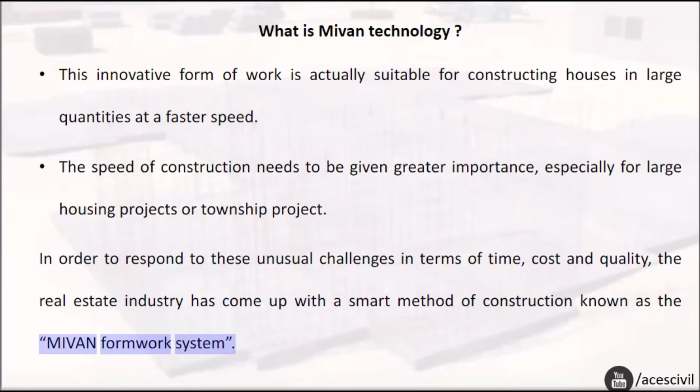In order to respond to these unusual challenges in terms of time, cost, and quality, the real estate industry has come up with a smart method of construction known as the MIVAN Formwork system.

MIVAN technology has been used widely in Europe, Asia, Gulf countries, and other parts of the globe. It is suitable for constructing a large number of houses in a short period of time using room-size forms to construct walls and slabs in one constant pour of concrete.

MIVAN shuttering is a fast-paced construction technique which offers strength and durability to a building by use of aluminum formworks. The MIVAN technology, or the aluminum formwork system, was developed by a European company. Later in 1990, the MIVAN Company Ltd started manufacturing these formworks, hence giving the name MIVAN technology.

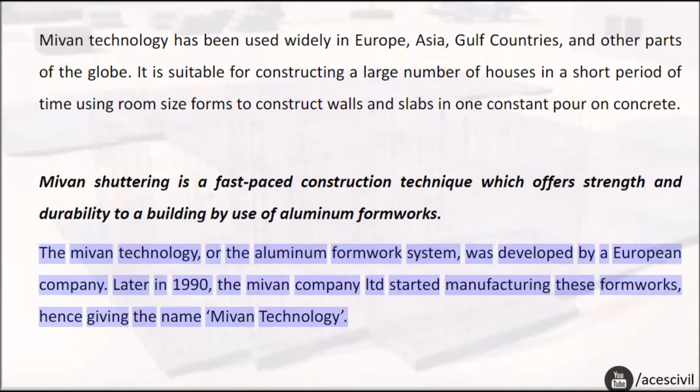Use in India: so far, the technology has not been used extensively in India. The concept is popular in Gulf countries, Europe, and some parts of Asia. However, its use is being promoted in India to realize the most ambitious government scheme, Housing for All by 2022.

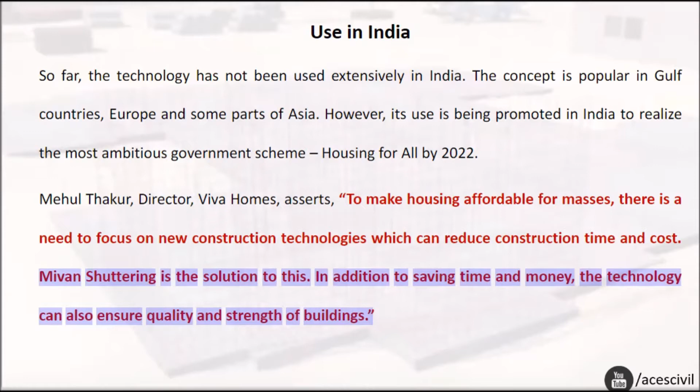Mehul Thakur, Director, Viva Homes, asserts: to make housing affordable for masses, there is a need to focus on new construction technologies which can reduce construction time and cost. MIVAN shuttering is the solution to this. In addition to saving time and money, the technology can also ensure quality and strength of buildings.

Major components of MIVAN Formwork. MIVAN Formwork components are divided into 4 types based on the location of use. First, wall components: A. Wall panel, B. Rocker, C. Kickers, and D. Stub pin.

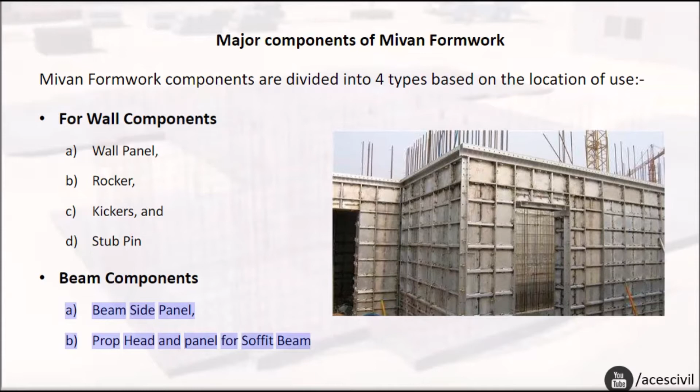Beam components: A. Beam side panel, B. Prop head and panel for soffit beam.

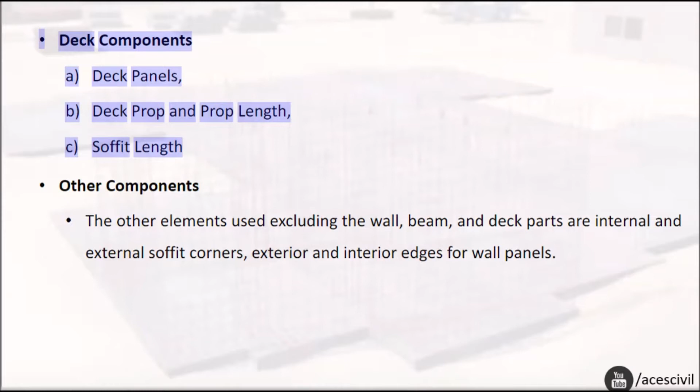Deck components: A. Deck panels, B. Deck prop and prop length, C. Soffit length.

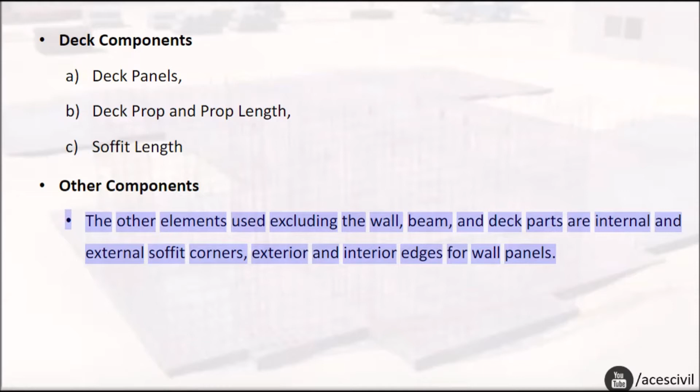Other components: the other elements used excluding the wall, beam, and deck parts are internal and external soffit corners, exterior and interior edges for wall panels. MIVAN Formwork components.

Erection, features, comparison. MIVAN Formwork is the advanced formwork system made of strong and sturdy aluminum components that has great strength, durability, is simple to install, adaptable, and is used in the construction of residential units and mass housing projects.

Components of MIVAN Formwork: the components of MIVAN Formwork are divided into 4 types based on the location of use - wall components, beam components, deck components, and other components.

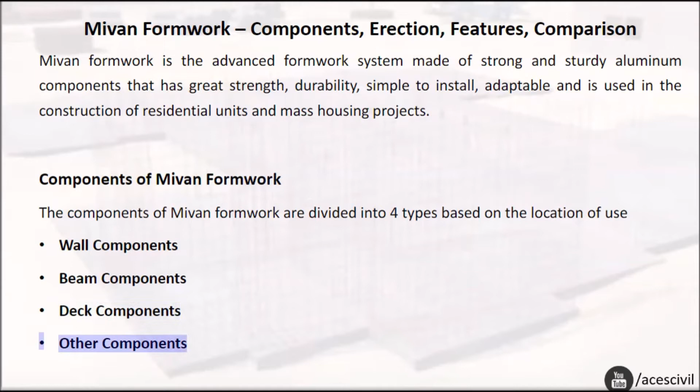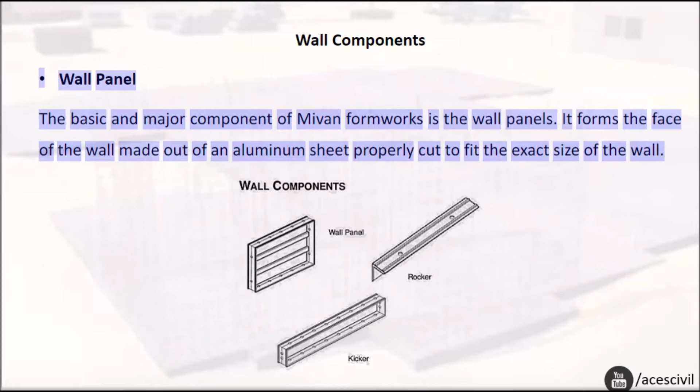Wall components. Wall panel: the basic and major component of MIVAN Formworks is the wall panels. It forms the face of the wall made out of an aluminum sheet properly cut to fit the exact size of the wall.

Rocker is an L-shaped panel having allotment holes for stub pin to support the wall panels. Kickers act as a ledge to support the wall panels by forming a wall face at the top of the panel. Stub pin is the joining component of all other wall components.

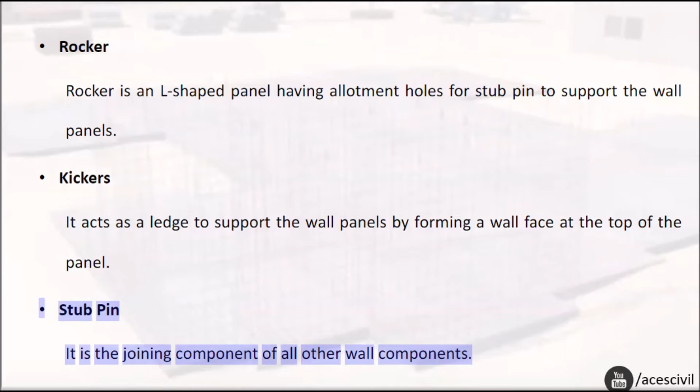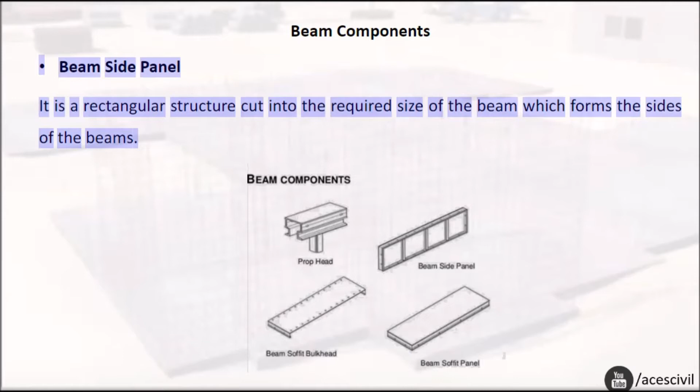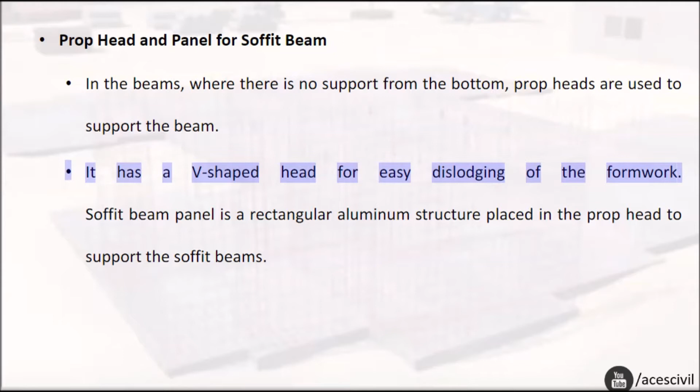Beam components. Beam side panel is a rectangular structure cut into the required size of the beam which forms the sides of the beams. Prop head and panel for soffit beam: in the beams, where there is no support from the bottom, prop heads are used to support the beam. It has a V-shaped head for easy dislodging of the formwork. Soffit beam panel is a rectangular aluminum structure placed in the prop head to support the soffit beams.

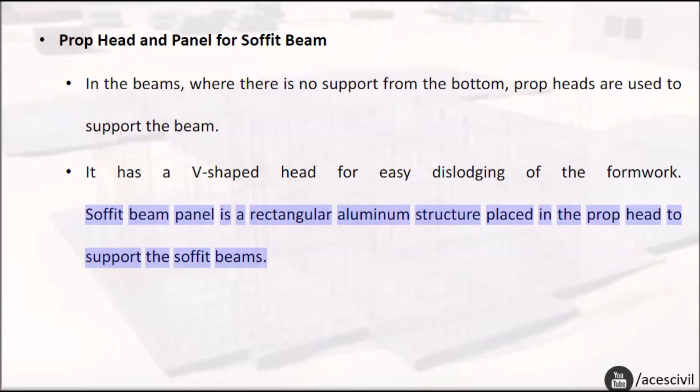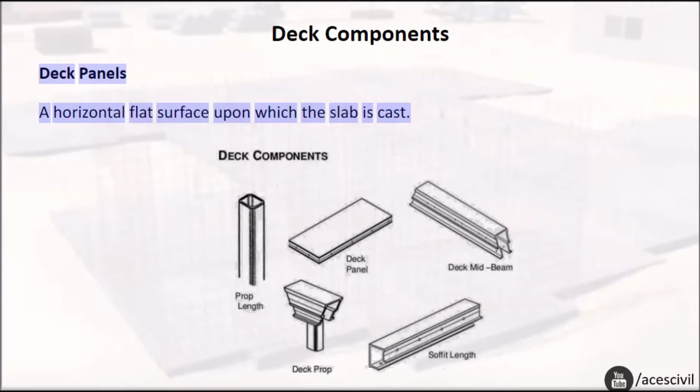Deck components. Deck panels form a horizontal flat surface upon which the slab is cast. Deck prop and prop length: deck prop is the same as the beam deck prop; here it is used to support the slab and bears the load coming on the deck panel. Prop lengths are the vertical support to the deck prop which are adjustable as per the slab height. Soffit length provides support to the edge of the deck panels at their perimeter of the room.

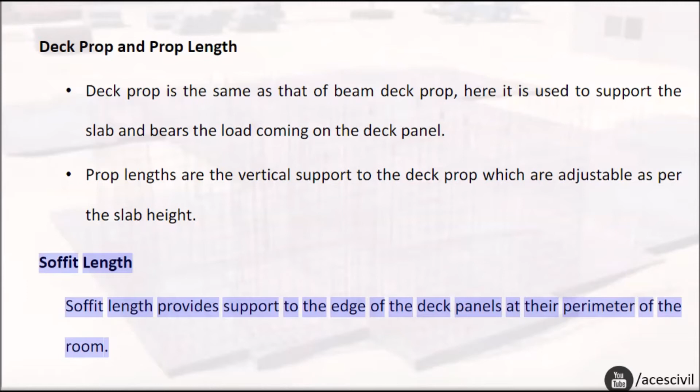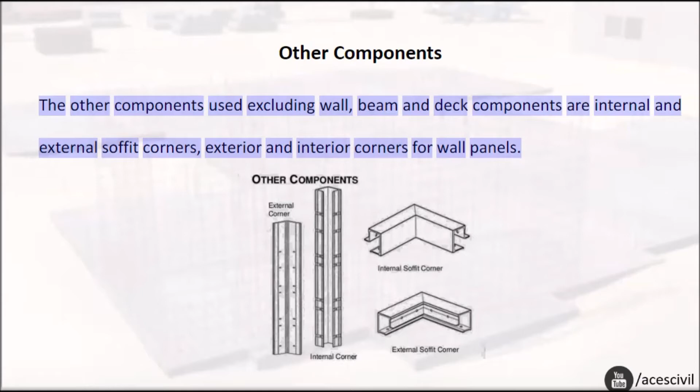Other components: the other components used excluding wall, beam, and deck components are internal and external soffit corners, exterior and interior corners for wall panels. Mivan construction technique.

Setting up the wall reinforcing steel. The wall reinforcing steel is used to give structure to the building and support the concrete until it gains half of the required strength.

The aluminum formworks are cast around the steel mesh, which is factory made and directly erected on the construction site. Placement of aluminum formwork.

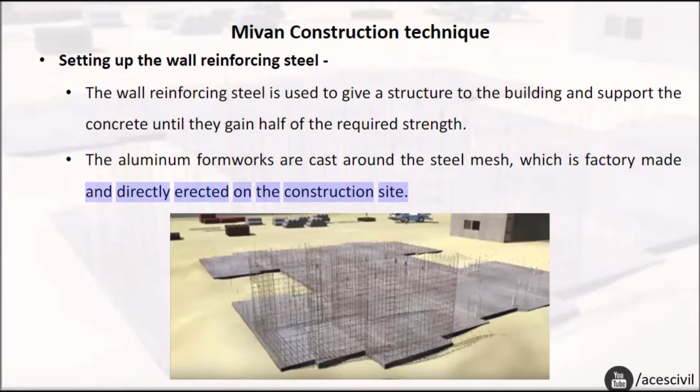Along the wall reinforcing steel, prefabricated room-sized walls and floor slabs are erected. These aluminum alloy slabs are accurately made and easy to handle. Spaces for windows, ducts, doors, and other features such as staircases, facade panels and chajjas are also integrated in these structures.

The forms are joined together using the pin and wedge system, which can be dismantled quickly after the concrete structure is made.

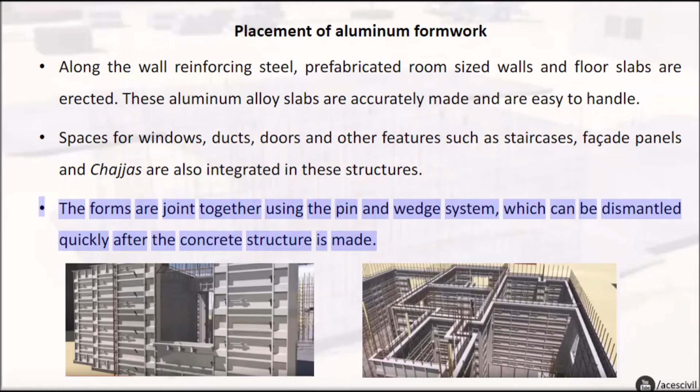Pouring concrete. After casting the forms, high-quality concrete is poured. This concrete takes the form and shape of the cast, which is later removed to make way for a structure made entirely of cement concrete supported by wall reinforcing steel. The aluminum forms can be reused at least 250 times, resulting in minimum waste from the construction site.

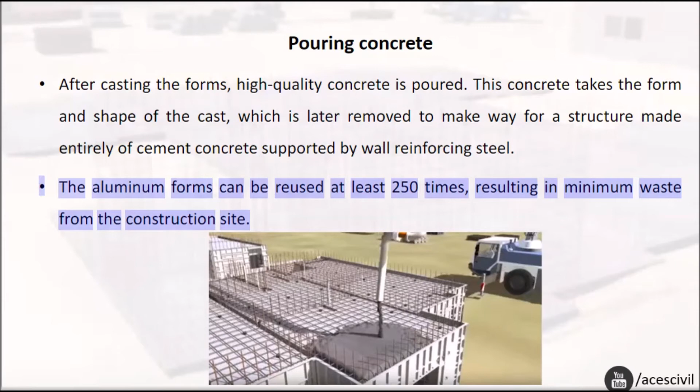The resulting structure is accurate, smooth, and finished. It has high tolerance and requires no further plastering. As a result, it saves time, effort, and money.

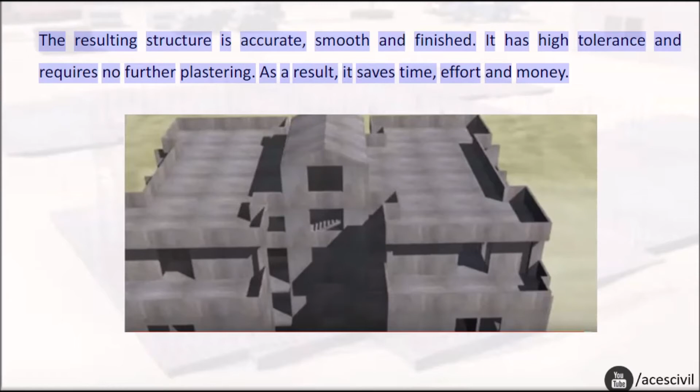Features of MIVAN Formwork. The major features of MIVAN Formwork are given below. First, load carrying capacity. The load carrying capacity of MIVAN Formwork is 7 to 8 tons per square meter. MIVAN Formwork is lightweight and weighs around 18 to 20 kg per square meter.

Second, striking time. The striking time of vertical wall formwork is 12 hours after concreting, or when concrete strength has reached 2 N/mm2, and horizontal deck formwork is 36 hours after concreting, or when concrete strength has reached 10 N/mm2.

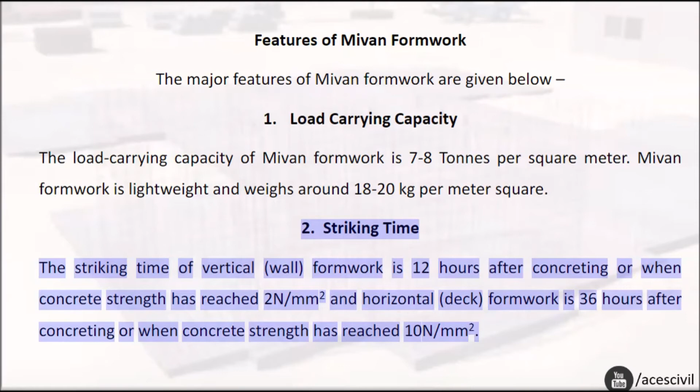Third, durability. As the panels of MIVAN Formwork are made of structural grade aluminum alloy, they are very durable and sturdy. A single component can be repeated around 250 times.

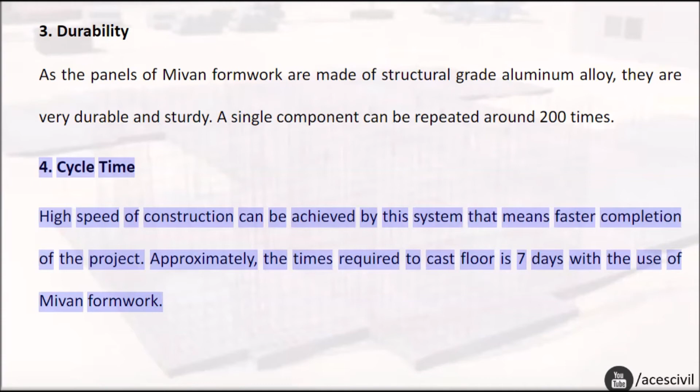Fourth, cycle time. High speed of construction can be achieved by this system, meaning faster completion of the project. Approximately, the time required to cast a floor is 7 days with the use of MIVAN Formwork.

Comparison between MIVAN Formwork and conventional formwork. Factors: conventional formwork versus MIVAN Formwork. Quality: conventional is normal, MIVAN is superior.

Speed of construction. The pace of conventional construction is slow due to step-by-step completion of different stages of activities required. Erection of formwork, concreting and de-shuttering is a 2-week cycle. In the MIVAN system, the walls and floor are cast together in one continuous operation in a matter of few hours, and inbuilt accelerated curing overnight enables removal and reuse of forms on a daily cycle basis.

External finishes. Conventional: cement plastered brickwork, painted with cement-based paint. MIVAN: textured or patterned colored concrete fascia can be provided, which does not need frequent repainting.

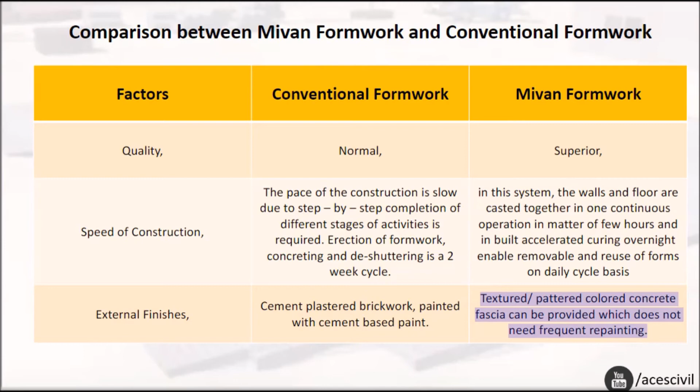Factors: conventional formwork versus MIVAN Formwork. Aesthetics: in the case of RCC structural formwork of columns and beams with partition brick walls, the columns and beams show unsightly projections in room interiors. In MIVAN, the room-sized wall panels and ceiling elements cast against steel plates have smooth finishes, and interiors have neat and clean lines without unsightly projections in room interiors.

Useful carpet area as percentage of plinth area. Conventional efficiency is around 83.5%. MIVAN efficiency is around 87.5%.

Consumption of raw materials, cement. Conventional: normal. MIVAN: consumption is more than that used in conventional structure.

Steel consumption. Conventional: less. MIVAN: high.

Maintenance. Conventional formwork has high maintenance due to repairs in plaster of wall and ceiling, repainting, and leakages due to plumbing installations. In MIVAN, the walls and ceiling being smooth and high-quality concrete, repairs for plastering and leakage are not at all required frequently.

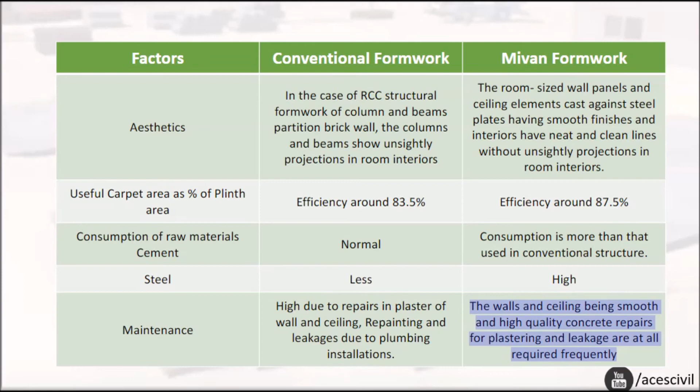Advantages of MIVAN Formwork. High-quality formwork ensures consistency of dimensions. On removal of the mold, a high-quality concrete finish is produced to accurate tolerances and verticality. The total system forms the complete concrete structure.

It is custom designed to suit project requirements, offering unsurpassed construction speed. Panels can be reused up to 250 times, and it can be erected using unskilled labor.